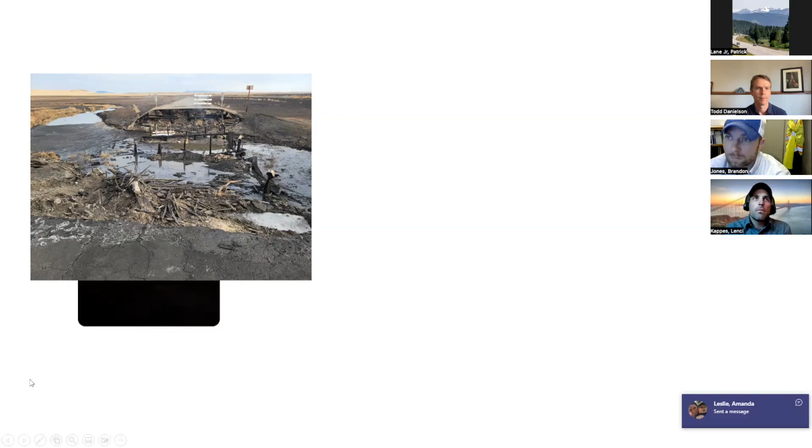Sometimes a picture's worth 1,000 words. As you can imagine, we're very proud of the work that the engineering team did on this project, and we've done a few different presentations on it. One of the things I'd just like to show is some actual footage of the structure as it was burning. This is what the structure looked like after the emergency services team was able to get the situation under control.

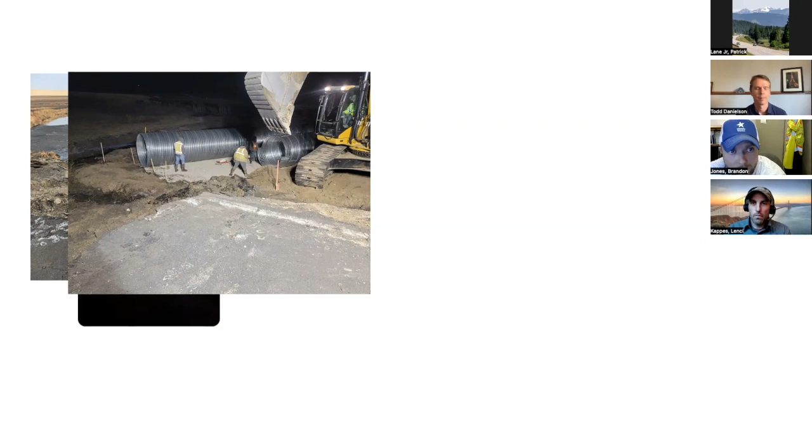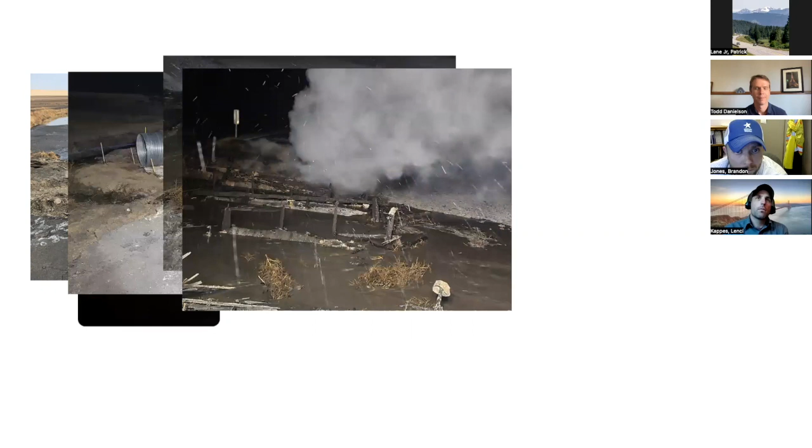This is some footage of the emergency repair with the culverts Lindsay was talking about, where our maintenance team deployed very quickly. Now, one of the things that is extremely interesting and unique about this project is in a matter of 1 to 3 days, we go from a wildfire, and conditions need to be dry and windy when you have a wildfire, to a situation where you're laying an emergency repair in with culverts, and all of a sudden you have a weather front in Montana move in.

And this gives you kind of an idea of the team effort that went into that. Now, in this picture, what you're seeing is the emergency repair for the roadway, but behind that it is also very important to see that railroad structure that burned as well.

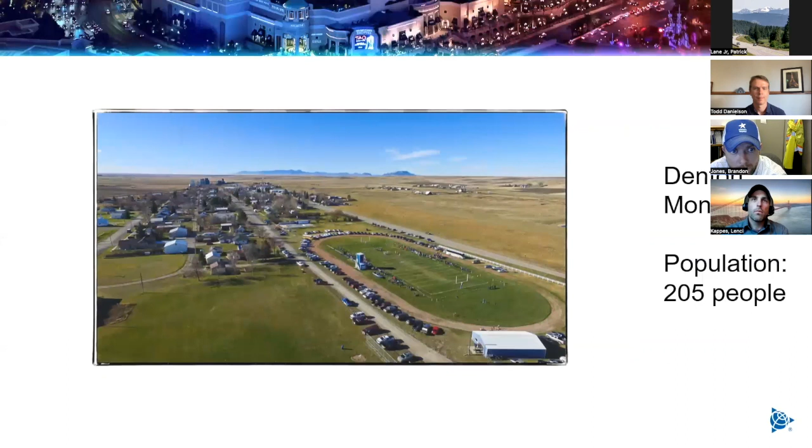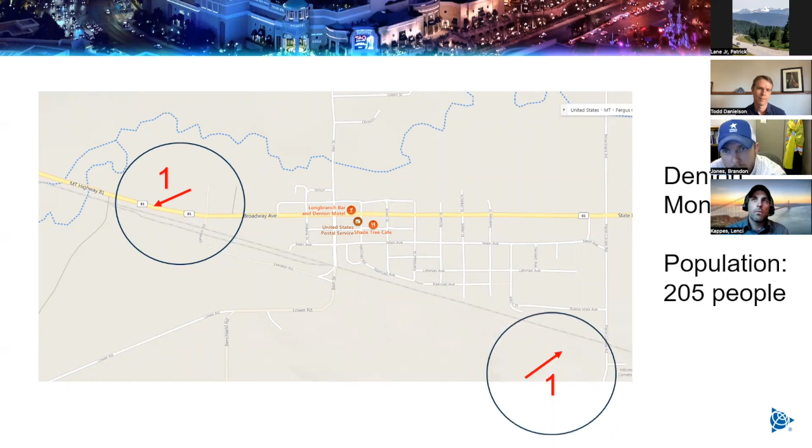When you're dealing with a community that has literally an access point to one side, could be the north side or the east side, and then the other access point would be to the other side. You have 205 people that are in Denton, Montana, and you have this route, Highway 81, into town or out of town, and then the other side of it into town or out of town, and that's it. And then all of a sudden, this fire burns the community.

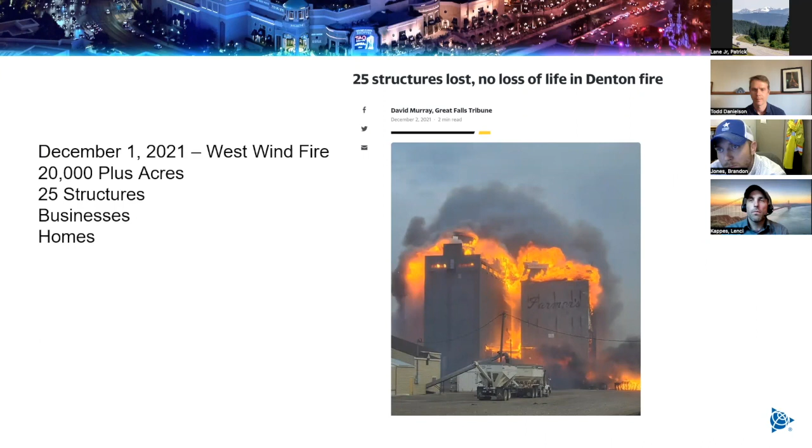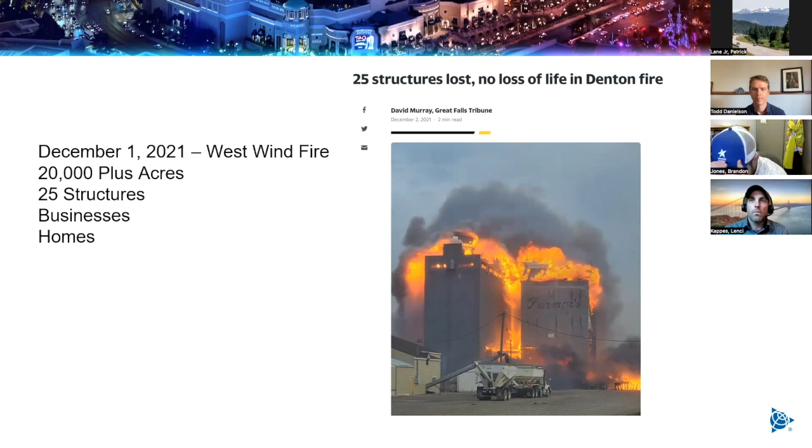Now, what you can see here are, of course, grain elevators, a very rural, very agricultural-based community. And of course, this time of year, they're also looking to move crops, and hence the railroad. So not only do we have transit for the community disabled, we also have the railroad disabled. And as you can imagine, infrastructure like that's critical to a community of this size. So that's why this project is at the hearts and minds of everyone at the DOT.

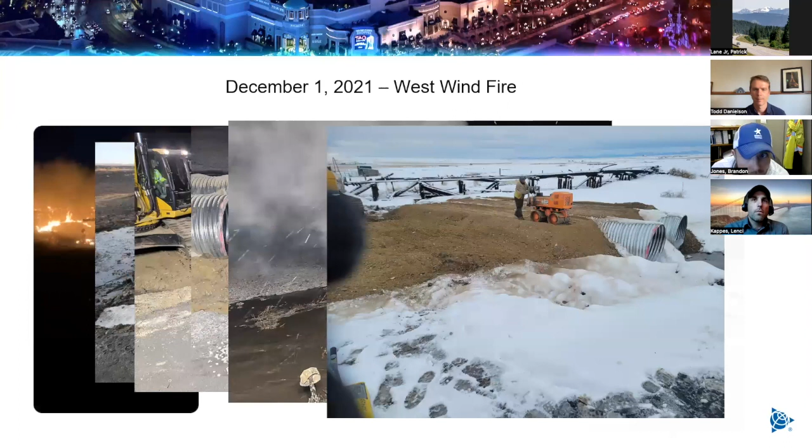And then we go through and show these photographs again. One thing that I want to reiterate as to what Lenci said is that when we look at what we were able to accomplish, I want it to specifically be known that without the engineers such as Lenci Kappes and Trevin Burkhartsmeyer and the other functional engineers, road design, Rebecca Barbula, there were many people at MDT that participated. The survey teams led by Bill Weber, everyone, it was all hands on deck in the middle of winter to capture this information.

Now, I know Lenci talked about this briefly, but you also have to remember with all that water building up and all of that snow and snow melt, you can imagine how complicating it would be to get a hydraulic survey. You can imagine how nearly impossible it would be to have surveyors provide Lenci and the design team with an accurate survey for starting a bridge design. Well, because of the workflows that our bridge team had created and deployed prior to this burn, we already had the steps in place to begin the designing without that actual survey delivered.

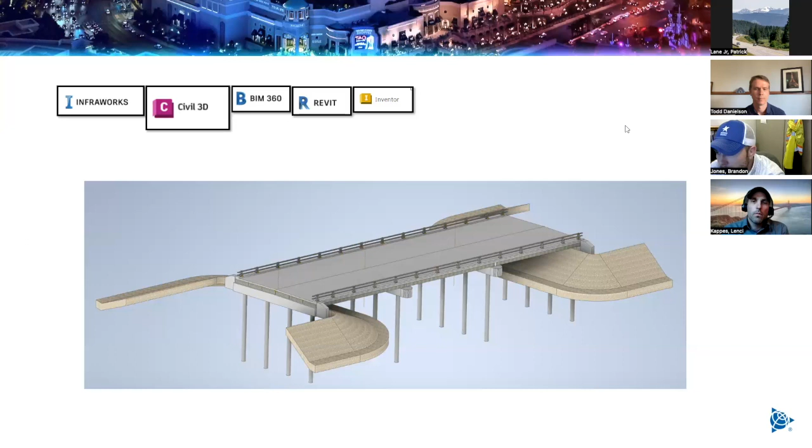And back to what Lenci said, then we start talking about the collaboration. We start talking about how we were able to look at the hydrology, how we were able to look at exactly what was being proposed as a solution to that bridge, not from a 2D plan set, but from a 3D parametric model. And of course, this model was important because it showed the challenges that were taken into consideration.

What you have to keep in mind is that by removing this highway bridge and then by removing the railroad bridge, if the highway bridge was built incorrectly, it would flood the new railroad bridge. The hydrology, because of the Wolf Creek, was very important and critical.

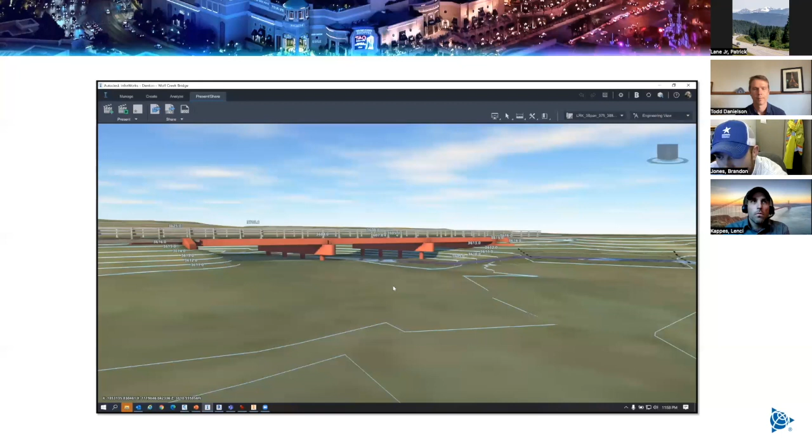And never before here at MDT had we had such a collaborative effort to get through hydrology challenges like we had with this project, because the hydraulics folks were allowed, using the workflows, to see the design model and then to overlay their model from SMS into this so that we could truly see a floodplain model with the design model and know that we were on to the correct solution and the best built bridge project for this location.

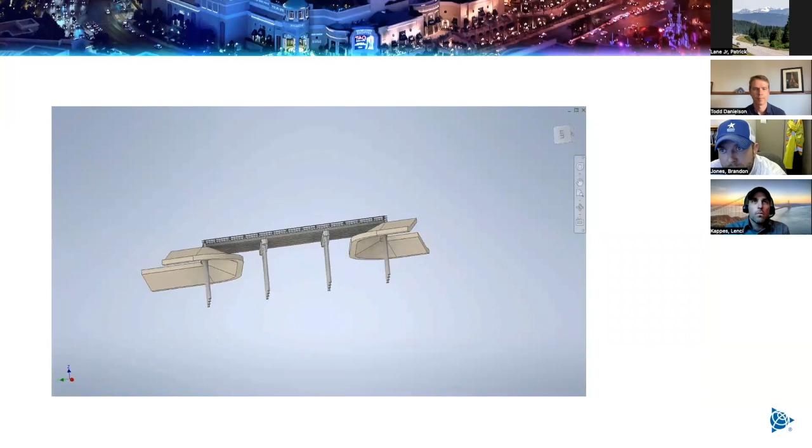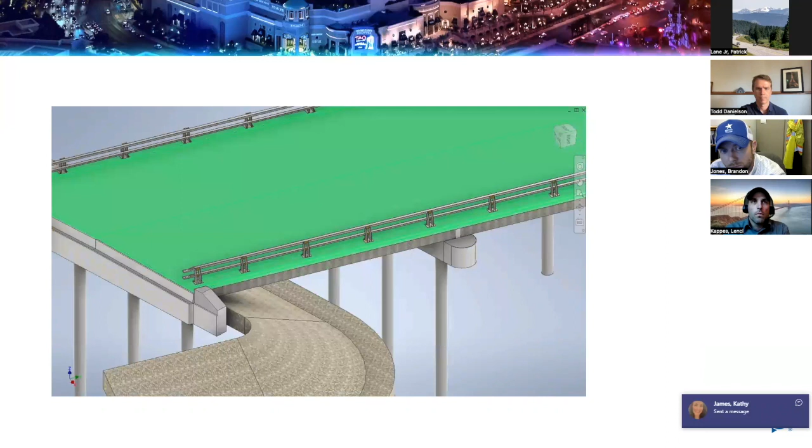That bridge was then sized, and Lenci had to begin ordering parts. One of the things that we also have to keep in mind is that when this happened, we were in the middle of a pandemic. And one of the challenges that Lenci ran into early was that he ordered, or was attempting to order, bridge piles. And he found out that the bridge pile sizes that he was looking at ordering were unavailable and would not be available for quite some time.

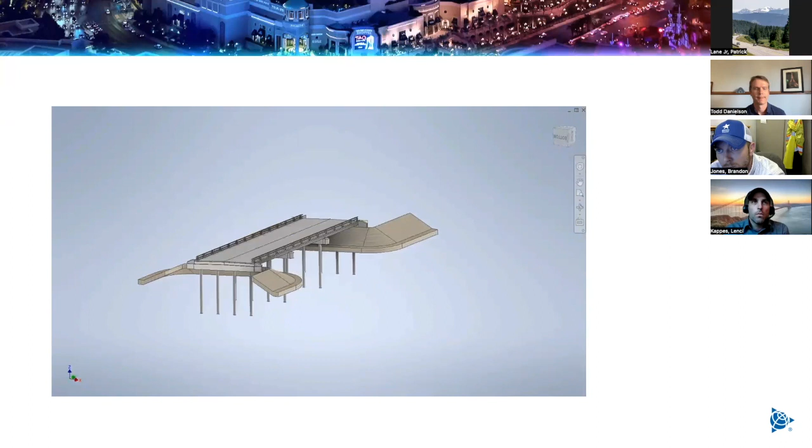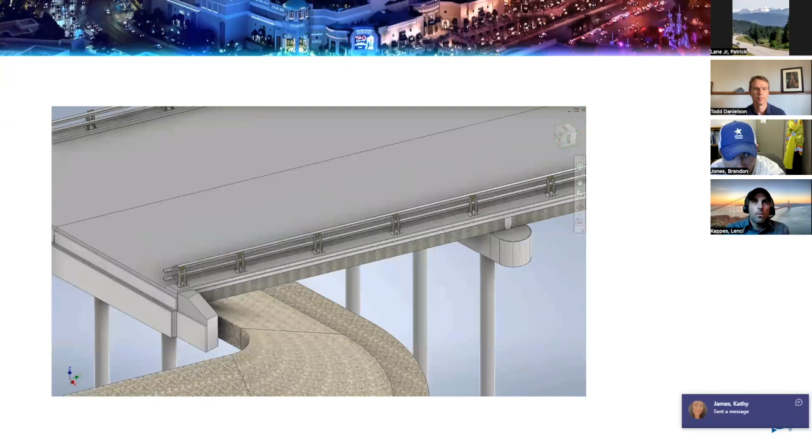And so by creating a parametric design, Lenci was able to find out what bridge piles, what sizes were available, and then to change those specific structures or components within this design, and then find out how that would affect the other components. And he did that and was able to order those piles so that we could move forward on this bridge much quicker than would have been possible without this design.

Another thing that was extremely important was that our team here at MDT wasn't necessarily ready to absorb a model for delivery. This is part of that digital delivery effort that we're building into. But through our partnership with USCAD, through the mentoring that we've gotten from USCAD, through all of these wonderful things that we've done with this implementation, we were able to work through the process of creating a very complex set of 2D drawings from the 3D model.

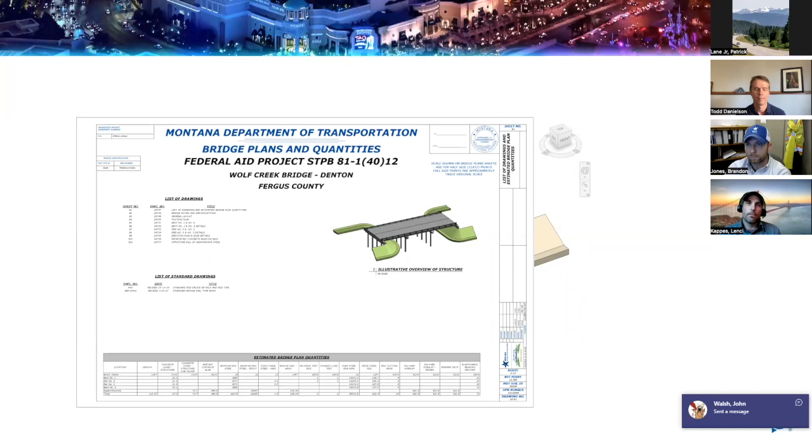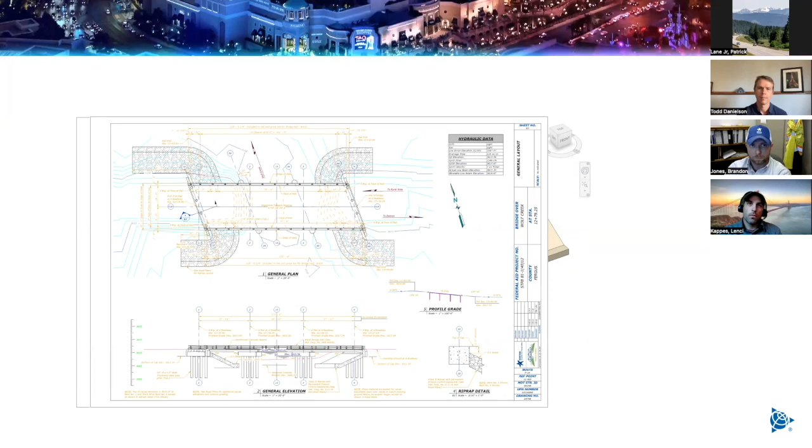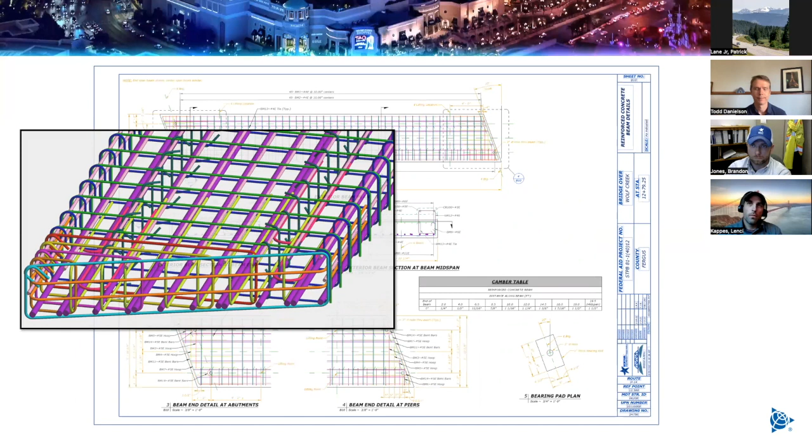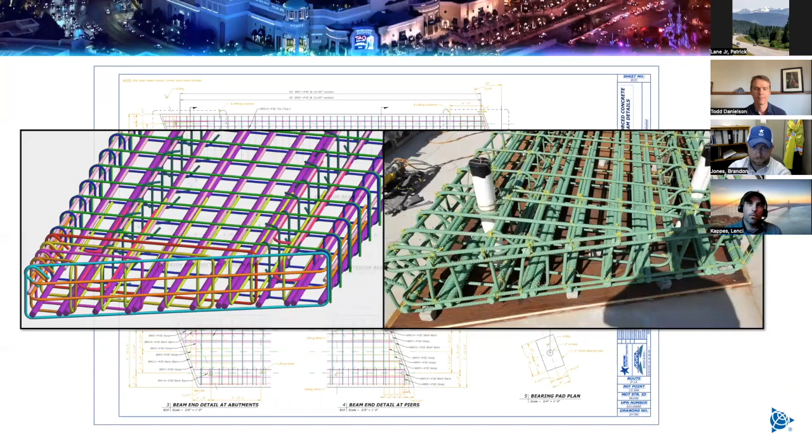And this says quite a bit about how important it is to understand how the complexities of a design model can be translated to a 2D plan set. And this was also seen as critically important because, as you can imagine, with this type of structure, you have a lot of subcontractors involved. In this case, we're looking at rebar. As you can see, the design was so detailed, we were able to actually order these cages based on the sheet sets and the data cut from that model. And then we saw the design actually becoming reality.

I don't, by any means, by presenting this data, want any credit for it. I just want to make sure that MDT and the amazing engineers we have are recognized, and we can get you a list of who those folks are. As I was saying, the pre-construction process was amazing, and I truly believe that Lenci and his team, and Brandon Graff and his team, like we talked about, the engineers from the outside consultants, the construction team, everyone played a pivotal role.

And I'll talk specifically about something we're very proud of here at MDT. This project wasn't about concrete. It wasn't about rebar. It wasn't about technology. This was about people pulling together to help people. And MDT is very focused on the communities that we serve. Many people that work here, all of our families and friends travel the highways. We all are very proud of the infrastructure here in Montana. And I think this was a project everyone could get behind because it affected families. It affected everyone from small children to senior citizens.

This was a community. We couldn't go in and rebuild their homes. We couldn't go in and do a whole lot. But one thing we could do is get behind getting this bridge fixed. And I think that's why it's such a passionate project for everyone, from the entry level person here at MDT all the way to the director. The director, Malcolm Long, personally went to the ribbon cutting. He was just very proud of the work that the team here at MDT put into this.

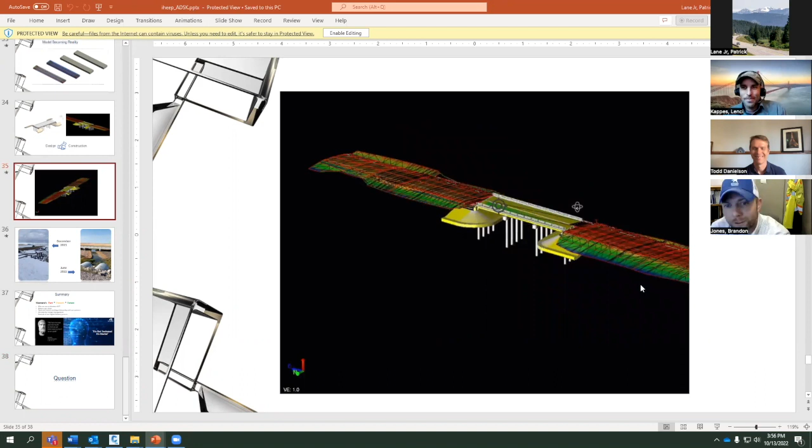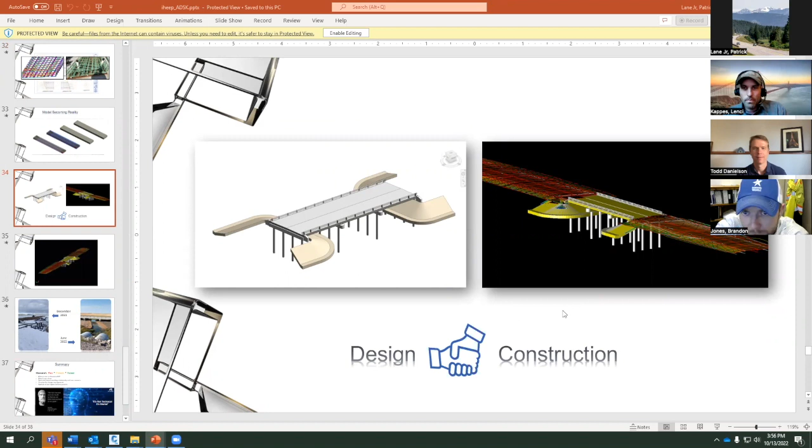So huge shout out to Brandon there. Oh yeah, this is just the Trimble Business Center model. You can see the roadway corridors tying into the bridges. So we have in that model the corridor meshes, and you can see the surfaces peeking out through that just a little bit as you rotate it about, and you can see how cleanly the roadway corridor surfaces tie into that skewed bridge. So yeah, it was a lot better than I expected.

I kind of expected when we brought all this into one place that there were going to be some surface mismatches, or surface conflictions, but it all tied in pretty well. So you asked Todd about two models, one story. So the story is Denton, Montana, and these are the two models. One being the pre-construction model using the Autodesk suite of tools, and one being the construction model using Trimble Business Center.

Now, how does this all relate to US CAD? Well, I really want to emphasize that during this entire process, US CAD was working with us in regards to this Autodesk implementation. And so we had access to technical engineers. We had access to, of course, Matt Vega. And through collaboration, through training, and through the assistance of creating new workflows, we were able to capture a great deal of information. And I want to say that US CAD's been a great partner, and we really have appreciated their involvement here at MDT.

And we look forward to doing more and more of these types of things as we move into the next few years, collaborating with them on the road side, just as we have on the bridge side. There are, of course, some development and design engineers at Autodesk that put a lot of effort into helping MDT and the bridge department. Just a lot of great people through our relationships with Autodesk as well as with US CAD. Not just with this project, but they're helping us understand the two model, one story concept on future projects.

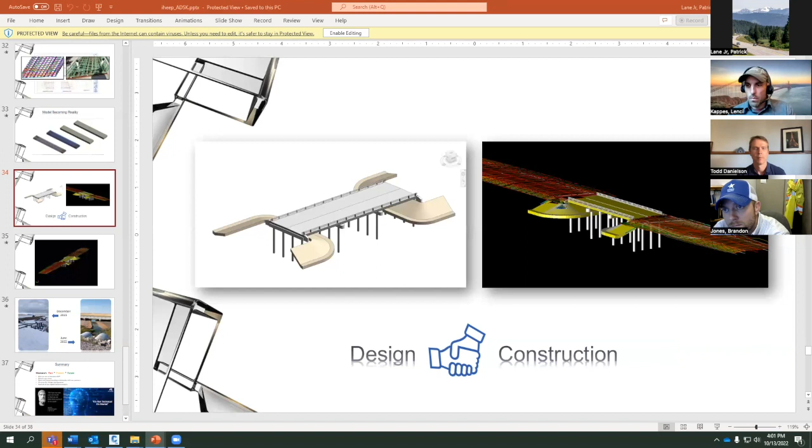Another thing from my standpoint, and something that can't be prefaced enough, is teamwork and collaboration. Using these tools to collaborate effectively and to be able to see dynamic changes in real time during design actually gave us a leg up. And that takes patience, that takes understanding, and that takes a commitment to work as a team. And I think we had an amazing team who, as I said earlier, didn't quite understand how we were going to get from A to Z, but were willing to try new things along the way.

I think for me, first and foremost, the tools were just that. They were a tool to be able to say, we can help this community. We think we're the best option to do this. And that's the message that I was able to send up my chain because we had a good handle on this, and I knew we could do it. I knew there'd be a lot of bumps along the way to do it. But what excites me about this is we're able to solve this problem for the community. And that's the first thing that we're able to do.

But along the way, these tools, it's all about the people that we get to work with. And so instead of navigating through siloed information amongst the ranks here between hydraulics and road design and coming up with this long thing, these tools allowed us to put a bridge model out in space that happened to be in Denton, and it allowed everybody to look at it, and it allowed us to bring in the hydraulic information.

It allowed us to get information to people that they needed to make their decisions. And so our old processes and schedules for project delivery were kind of thrown out the window on this, because we had this chance to say, let's just get in there and get this thing built. And then we brought our old schedule stuff back as a checklist to make sure we didn't forget anything. And so to be able to do that really opened the window on what we could do with these tools.